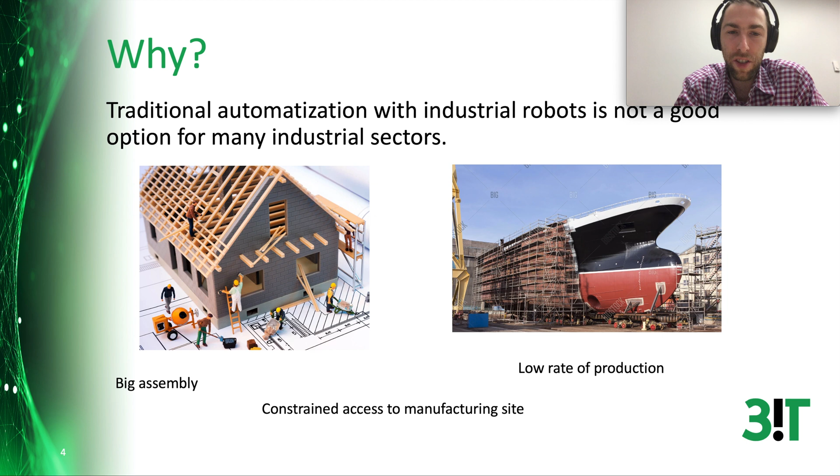So first, what are we trying to do with these wearable robotic systems? One big challenge we are trying to address is that traditional automation with industrial robots is not a very good option in many sectors, especially sectors where you need to build something like a building, for instance, or a ship, or any big assembly where you have a low rate of production. They don't meet the requirements, so using traditional automation is not a good idea basically.

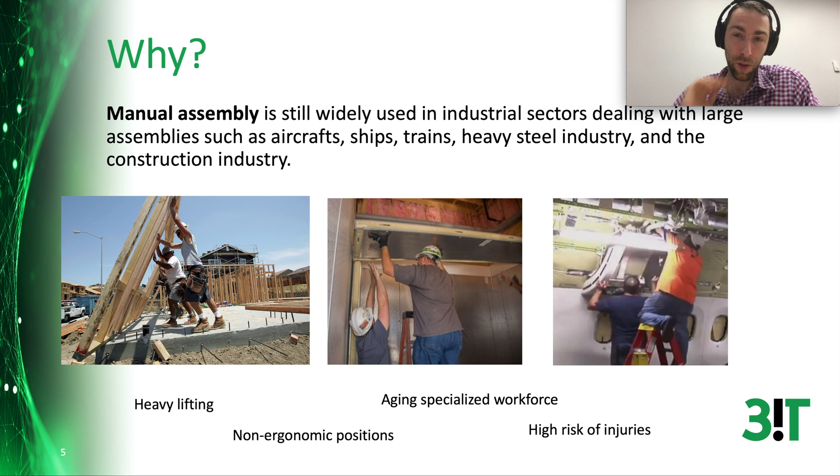In those fields, it's still mostly manual labor that is used for building those big assemblies, either a building, an airplane, or ships. And there's a lot of issues—the workforce is aging, and there's a lot of injury in those fields. So how can we use robots to help those industrial sectors? That's basically what we are trying to do.

And an alternative to full automation, which in those sectors I would say is quite far away... I'll be moving this, I think it will be better. Yeah. So one of the big challenges we are trying to address—is this disappearing? Oh, all right, sorry.

So one of the ideas is instead of trying to fully automate those fields, let's try to augment human workers. We don't want to replace them, we want to improve them basically. The idea is that humans are very good at some tasks, and maybe we can leverage the good abilities of humans and also the good side of robotic systems to create a good system where both human and robot can help in those sectors. This is where wearable robots come in.

Two big ideas: accessibility to manufacturing sites is a challenge. Humans are very good at navigation in complex environments, so maybe we can use humans to go where we need to do manufacturing operations, instead of having a complex robotic system just to navigate a complex manufacturing site.

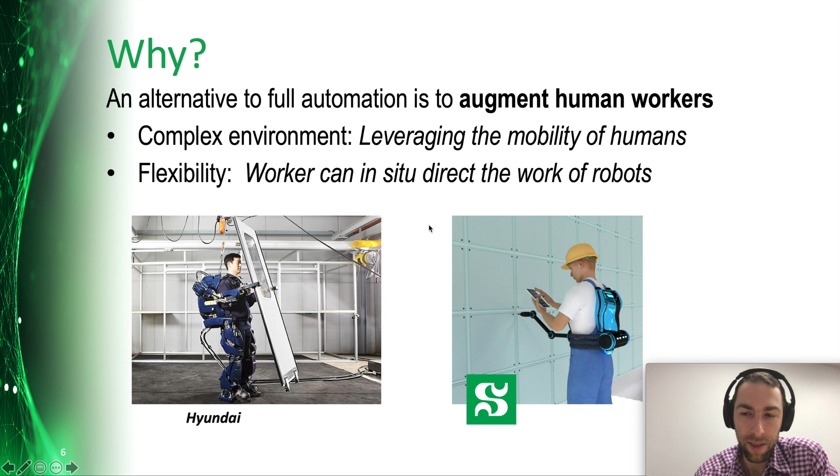So today I'm going to mostly focus on the robots we are building for human augmentation. It's not the only field that could benefit from such a system—there's also rehabilitation, elderly assistance, and prosthetics. I'm going to focus on this, but it doesn't mean the technology we're developing won't be useful for all those other areas. In fact, many of the technical challenges are similar for exoskeletons, prosthetics, any kind of wearable robotic system. They share a lot of the challenges.

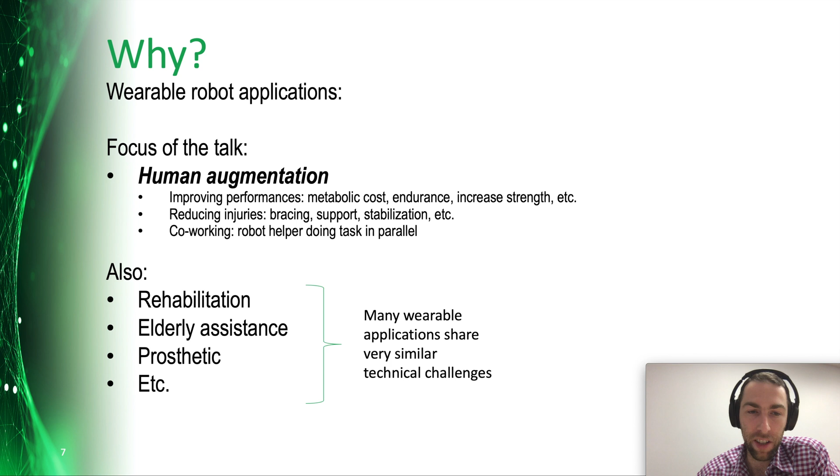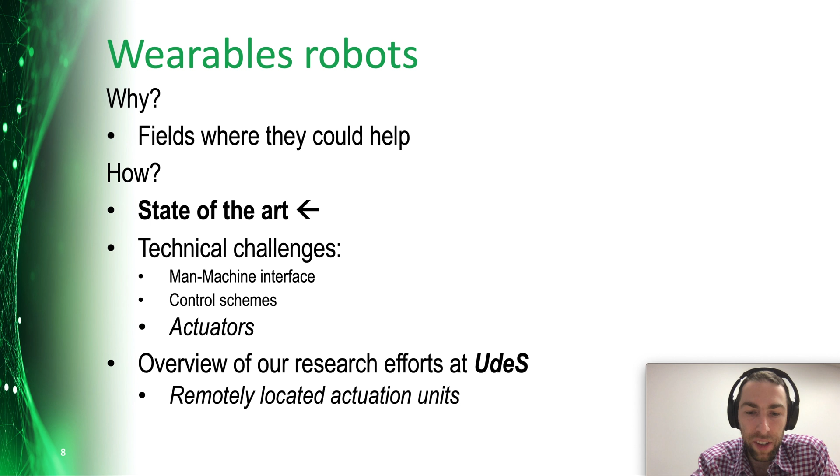So let's now look a little bit at what people have been trying to build and use in terms of wearable robotic systems. The one that most people know are exoskeletons. A few people have been trying to work on exoskeletons, and there's I would say one axis in terms of the goal of what people are trying to do.

Some people are building very lightweight exoskeletons where the goal is metabolic cost—they want to produce very small force just so a human can carry a bigger load for a longer distance without too much fatigue, for instance. On the other hand, with big exoskeletons, the goal is different—it's trying to increase human strength basically.

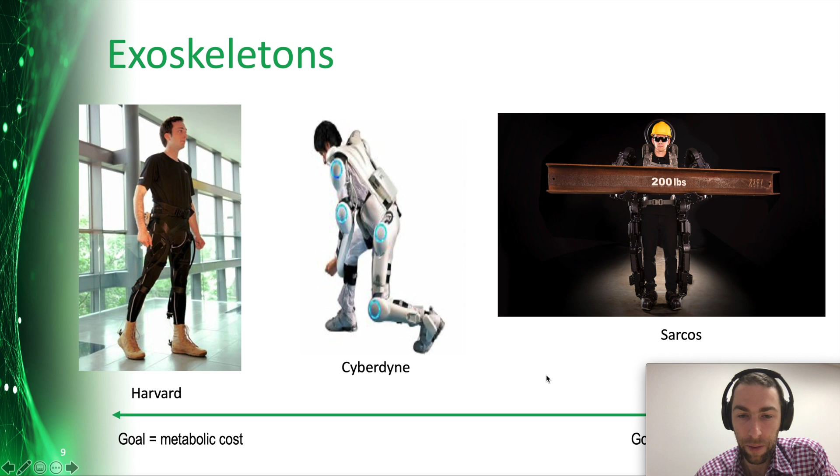There's also an interesting passive device that people have been building, and I think those will be the first type of wearables, not really a robotic system. I don't think we can call them robots, but I think those devices are going to be the first thing on the market, and maybe the ones with a little bit of actuation will be the first robotic system that can really penetrate the market as a kind of low-hanging fruit.

Interestingly, those devices have different goals too, but it's mostly strength and fatigue that they can help with. So for instance, the device in the center is meant to compensate for gravity so you can manipulate heavy objects more easily. You can also help with fatigue by supporting the human body and posture where you would easily fatigue yourself.

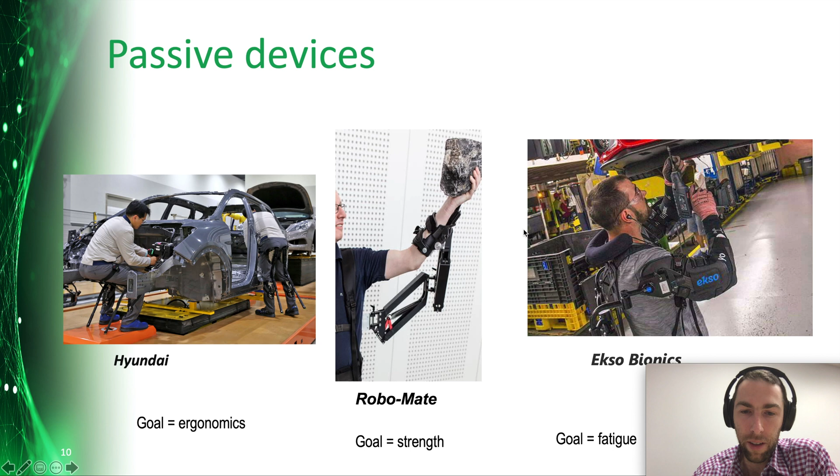The focus of the talk here would be about extra limbs, supernumerary limbs - a third arm or third leg, those types of things, or even an extra finger, for instance. Today I'm working mostly on arms and extra legs in my laboratory here at Sherbrooke University.

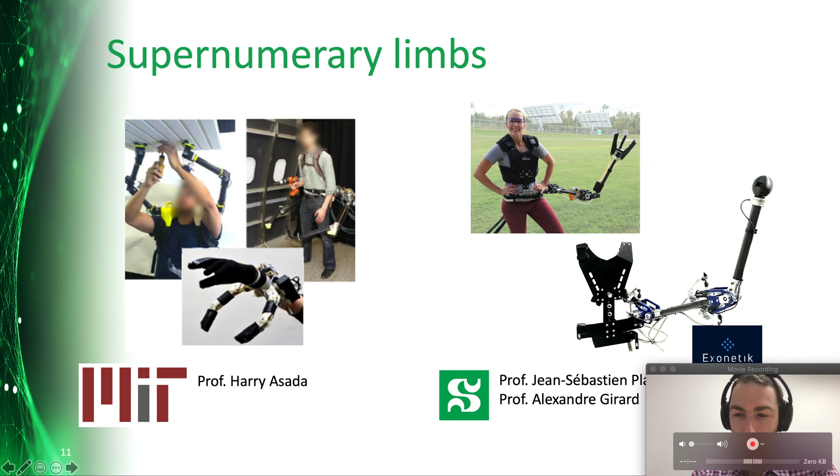In the next few slides, I'm going to discuss an overview, also including a few of the experiments done at MIT, where I spent 4 years in Professor Asada's laboratory. I'm going to take a step back to discuss the global technical challenges, and then at the end go back into more detail about what I'm currently doing.

So first, why? I'm sorry, there's again the problem with this here. It's gonna disappear. Ah, there you go. So where was I?

So why extra limb and not just building a better exoskeleton? It's the first question that comes to mind when people see what we are trying to do. There are multiple advantages for extra limbs.

The first one is simple: the kinematics can be easier if you are not trying to follow the human body - it's just a mechanical design advantage. The human body, especially the joints, are highly complex, and trying to match their kinematics is hard. For instance, if your goal is to provide a force at the payload and transfer this force to the hips of the user, going straight to the goal with this parallel structure may be a better idea than trying to follow the complex kinematics of the shoulder.